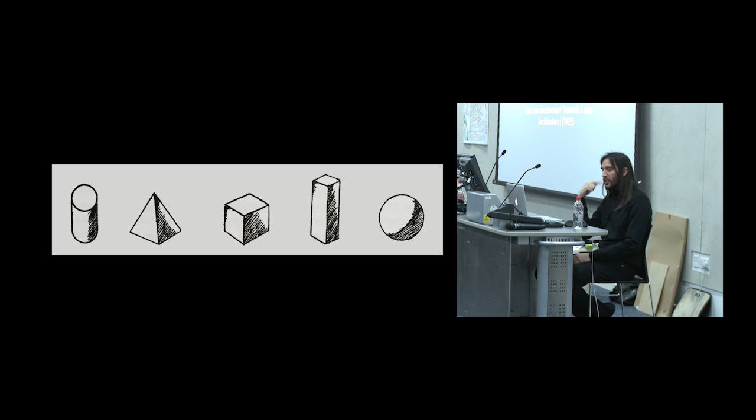Like 20 years later, modernism is at its peak, and we see Mies van der Rohe. He builds the Farnsworth House, again, built over 2 platforms. So nature can live its own life, he says. So again, it's very clear what's architecture, what's the intervention, figure-ground relationship. There's nothing wrong with it, but you can tell that the relationship they have between the intervention and the context is very clear.

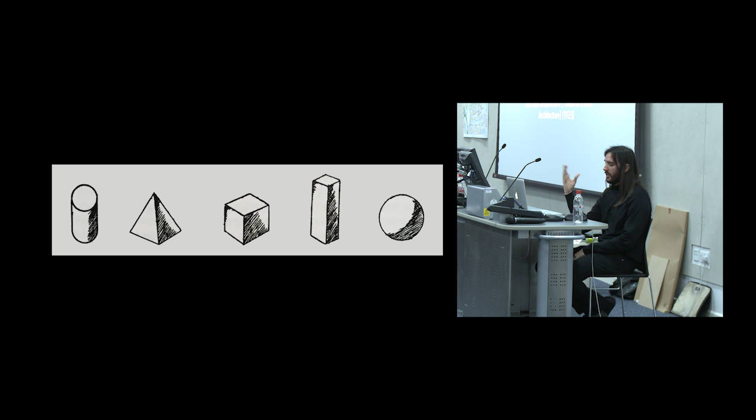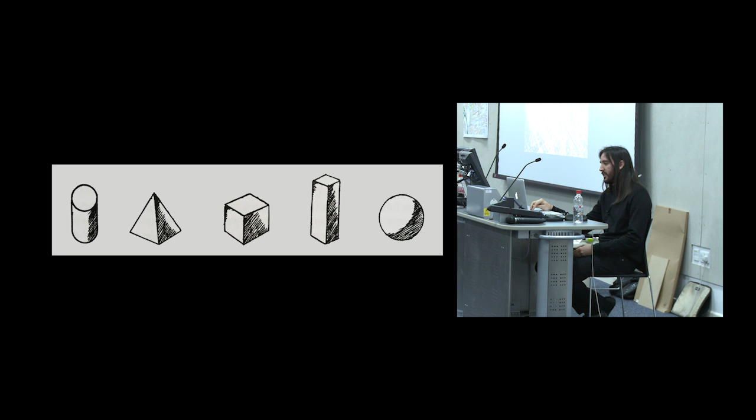What happens when we go to a wider scale? We can go to Unité d'Habitation, Marseille, a wider building, also dwellings, same principle. Over the structure, you have the nature, a very modernist approach. And if we keep going to a bigger scale, things like this start to happen. As you know, modernism is strongly linked to Fordism. The Fordist society, named after Henry Ford, the one that did the cars, is a notion of modern economic and social system based on a standardized and industrialized form of mass production.

So if we look at the intervention, I mean, the whole lecture is going to be, I'm going to be repeating the 3 key points. One would be the figure-ground relationship. The other one would be scale, and the other one is the design approach.

From the figure-ground relationship, we see the same relationship that Villa Savoye or Farnsworth House have. So it's a mutual exclusion. It's very clear where the intervention is. You have the intervention, you have the context. There's the sharp outline that we saw in Le Corbusier's definition of architecture.

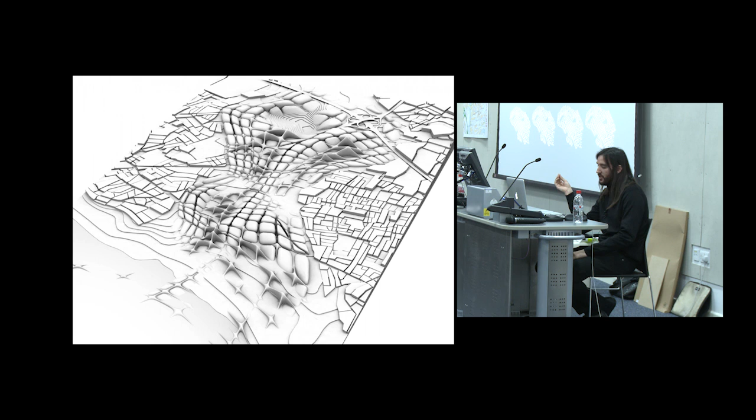So how would parametricists or parametric strategies deal with these things? So the answer to these 3 key points, from the figure-ground relationship point of view, the intervention is not a closed system of relationships. So the proposal absorbs, interprets, and incorporates information from the site. I will go later into these examples, but you can see how the intervention blends into the site until there's a moment where you can't really tell where the intervention starts and where it ends.

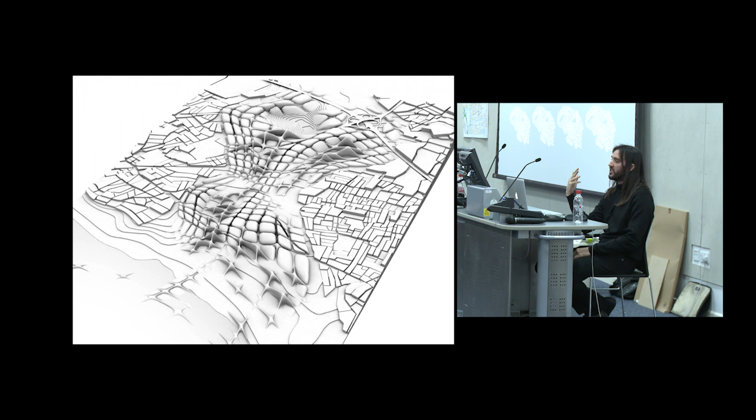Similar to what you can see in Cubist paintings from Picasso or Braque, where you have the figure and the background, but it's not clear where the figure ends or where the background ends.

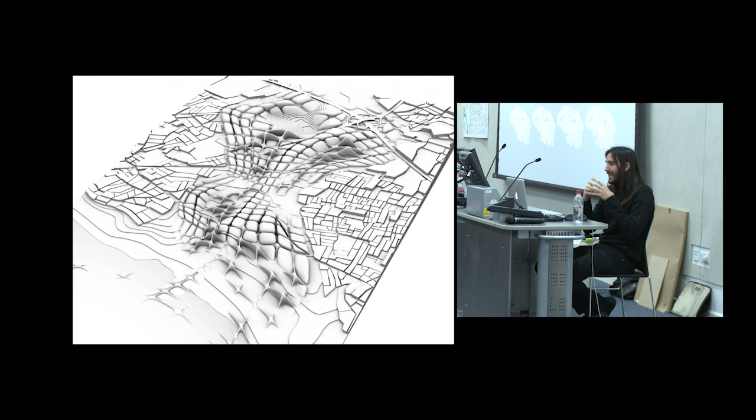From the scale point of view, as opposed to the Fordist logic, to the modernist logic of the repetition of a universal type or optimized solution, the strategy here is continuous differentiation. So it allows us to hybridize different typologies, allowing us to adapt them to the environment. So there's a balance between difference and repetition that allows us to create continuous gradients. And this is crucial because it will enable the architect to work across all different scales, maintaining the same logic, as we'll see later with some examples.

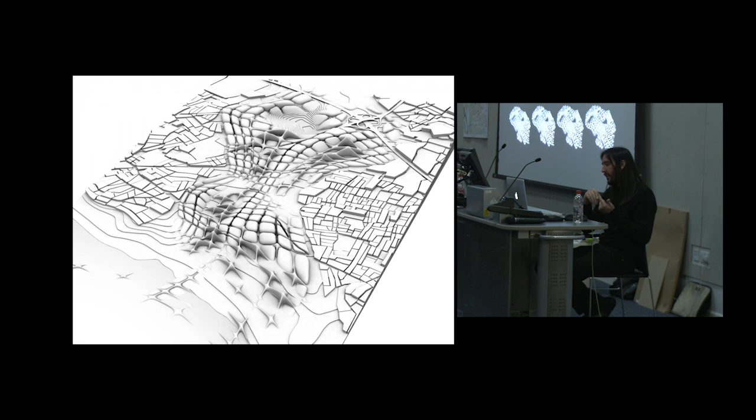And last, so we've talked about the figure-ground relationship, the scale, and then the design strategy. So the final result here is not the end of a linear process imposed from the top. The design emerges from the different relationships that we find in dynamic fields. So here we have a funny word, fields. What are fields for us?

So Patrick Schumacher, at the Venice Biennale in 2008, basically read the Parametricist manifesto. And he said modernism was founded on the concept of space, while parametricism differentiates fields. So fields are full, as if filled with a fluid medium. To visualize this, we can think of liquid, where you drop a stone and then you can see the ripples, or we can think of swarms in nature or flocks.

Every time I mention this, it comes to my mind the first time I went to the Piazza Navona in Rome. If you go at dusk, sunset, you see all these birds dancing and flying, no? And it's amazing because you see thousands of birds, and every individual is different, but they all move at the same speed and they keep the same distance from each other. And the moment one moves or deviates, the whole system readapts itself and it balances itself.

And you get these immensely complex forms, but these forms emerge from the behavior of individual agents. So it's not imposed from the top down. When you do tabula rasa and say, okay, I'm going to do my intervention, I wipe out everything, and now I put my order. No, the order emerges from the system. So I think that's the best metaphor I can think of for a field, how fields work.

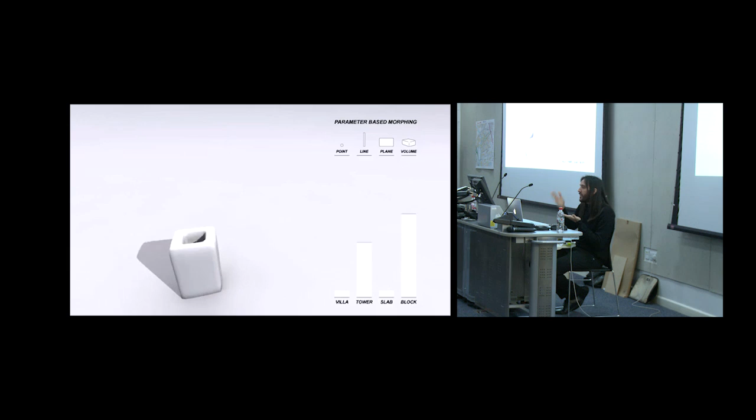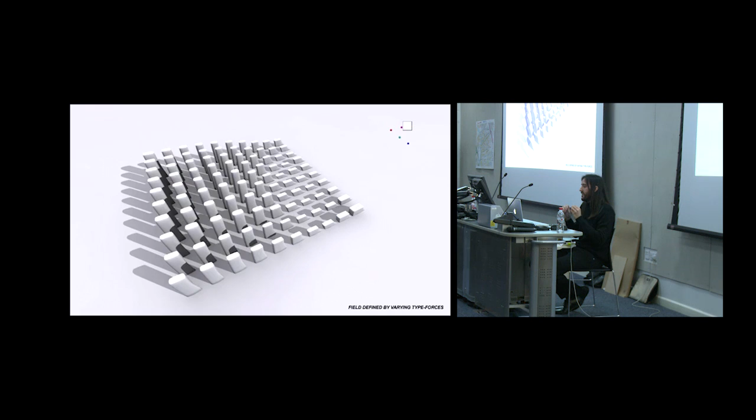But instead of then populating the intervention out of repetition, what we do is we blend them. We start finding all the intermediate situations that you can find. What happens if you put a bit of villa, a bit of tower, a bit of block, a bit of slab? There's an infinite number of possibilities that then arise. So you can then start generating fields when one condition dominates the others, and you can then start playing with density: okay, what happens if the blocks lose the patio, or what happens if we need to create a cluster of towers. These kinds of situations start to emerge.

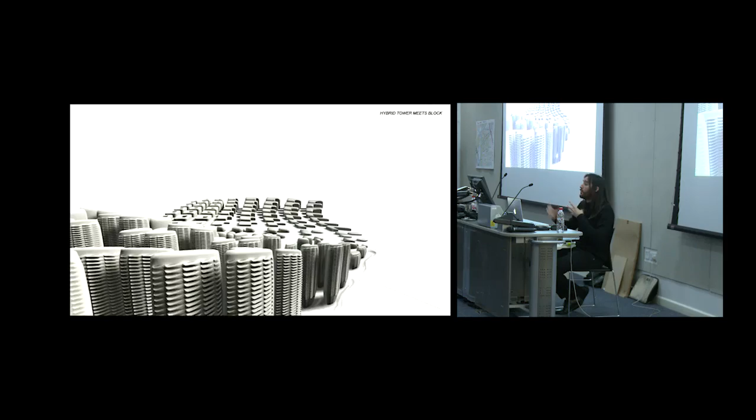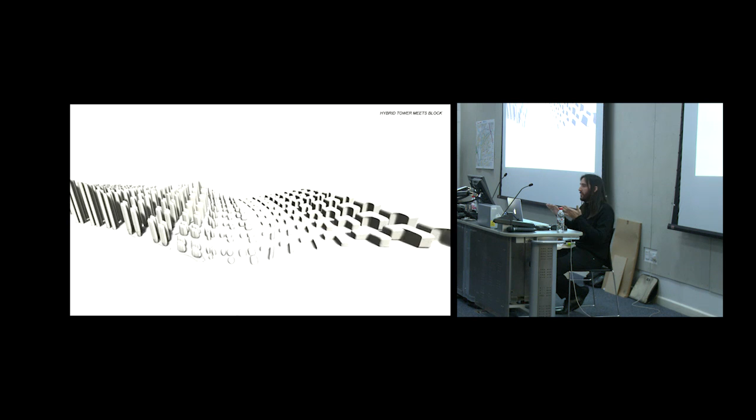But as you can see, we're not dealing with an optimized solution; we're actually blending them, mixing them. So what we need to do first, in order to get some order, is: okay, we have a tool, how can we use it? We have these different typologies, let's start blending them, let's start pairing them. So here we pair, I don't know, tower with block, for example, and we can see how the tower becomes a block, but you never have a pure tower or a pure block. There's always some sort of gradient, continuous differentiation across the system.

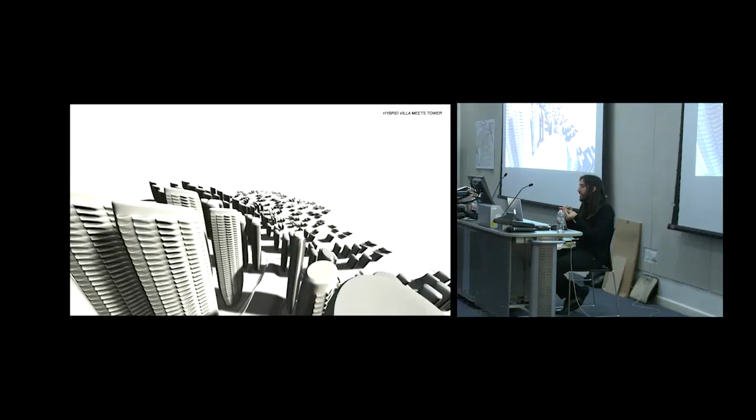And then all the different typologies in the middle that we could not have guessed or come up with. It would take you an eternity to go through all these iterations. And this is why you set the limits of the tool. So in these abstract field studies, what we're doing is developing the sensibility with the tool, knowing what the limits are: how much can we stretch the villa, how much can we stretch the slab block, what happens with the towers, do they have balconies, when do they lose them, can we actually pair two completely opposite types, and new typologies, new orders start to emerge.

If we were just repeating the typologies that we had, it would be very easy to guess, and you would have very clear outlines. Where does the villa neighborhood end? Where does the tower neighborhood end? While here, it's a gradient, and in the middle, a new sort of order emerges. It's not imposed from the top down. So we're not doing repetition. We're not imposing the order from the top down. But at the same time, we do have a very controlled system where if we want to do clusters of towers, if we want to increase the density, we know what we have to do.

So once we've tried all these different possibilities, we take them on site: okay, where is the intervention? And then we define the lines of the intervention. We have a site, and we have lines of influence, where these things are going to happen and how. Before it was an abstract exercise, now they're actually going to affect each other. We were only pairing two types, now we're going to put in the whole thing. So we create a responsive field so that we can do the same that we were doing with the villas, but with all the typologies.

So at a different scale, how much villa do I want to have in the system, how much tower do I want to have, is the point, the line, the plane, and the volume that you see on the top right. So this system is always alive. A bit like the birds, when one moves, the whole system adapts. And that's the beauty of it in a way.

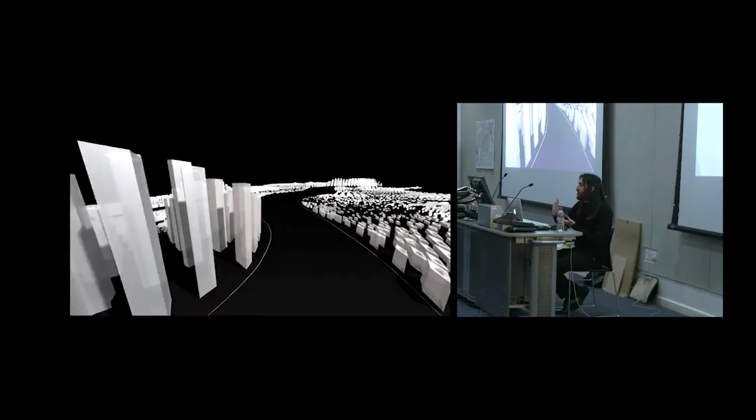It blends. You can't really tell where one neighborhood ends or the other. You get densities that come up, you get clusters, so it's these new types of relationships that appear that we wouldn't have been able to map otherwise.

So again, this was a project that we did in 2007, and you may think, well, how many computers have you got at Zaha? Maybe you have like 200 computers just rendering this. How can I do this with my laptop? Well, I also want to destroy that myth a bit. These ideas are not new, and it's actually very, very simple to build a parametric model with no computers involved. This is not from the office.

This is an exercise called Finding Form from Frei Otto and Bodo Rasch. It's an abstract example, but it'll help us understand how we use this and how it helps us take this abstract exercise to a different stage. So what they do here, they set out to map a city into a ring. They divide it in an equal number of points, and the points are the houses or the places you go to in the city. And you connect each point to all the other points with a thread of wool.

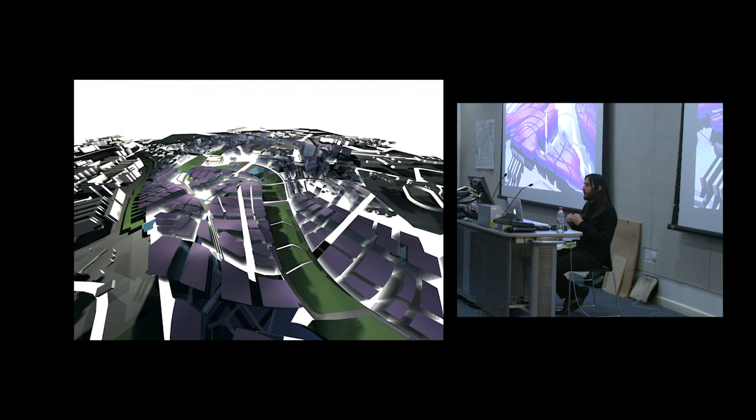It also helps to produce a strong sense of identity. We can remember the image I was showing from Ludwig Hilberseimer. Here there's no repetition, so you have an original skyline that engenders a unique sense of place, because you also generate all these different microenvironments. It's not repetition.

Each place is different, but it's all part of a system, so the coherence of the intervention is maintained. So you have unity in difference. You have all these different blocks, but they are unified by the overall logic of the system. So there's flexibility, but there's no chaos.

It's still a grid. But the morphology that we're proposing is, I would say, much more pliant or resilient to adapt itself, to absorb the information. If you have a pure block or a pure platonic solid, when you get to the edges, you don't know what to do with it because you have to chop it or you have to deform it.

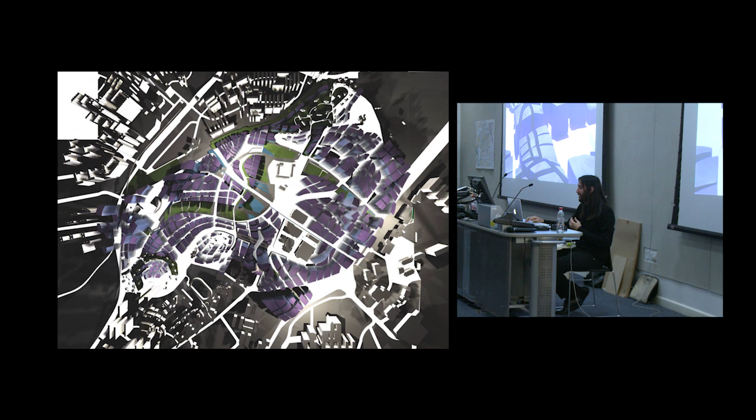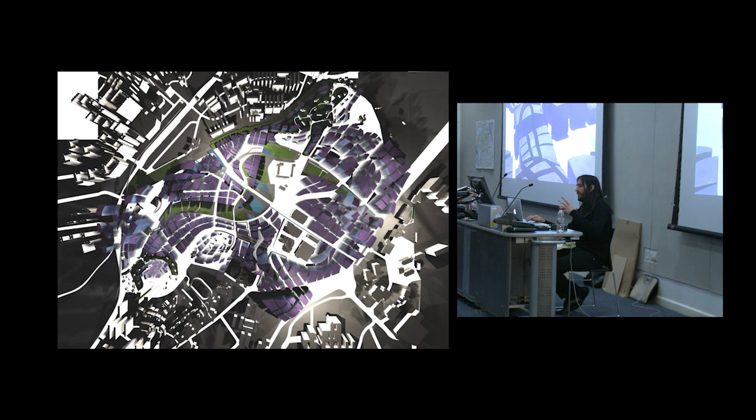But here, deformation no longer means the breakdown of an order. It's the lawful inscription of information. So you're actually given information. It's not a bad thing to deform. And obviously, it helps you then to orient yourself. It's what you see in the old towns of any city in reality. It's just like time. So this was the master plan. And again, I'd like to stress, it's not about the formal language, it's about the strategy.

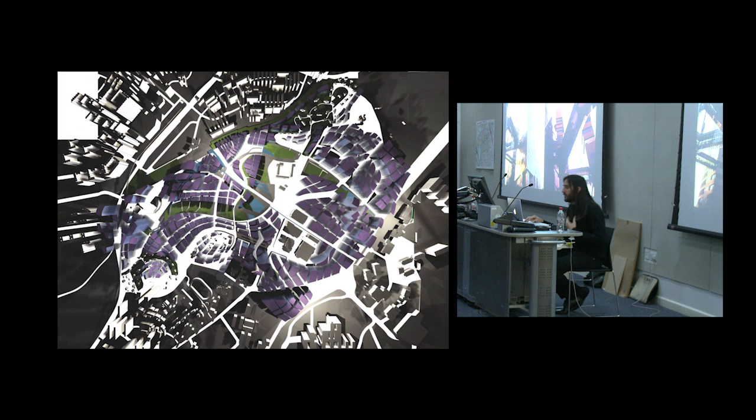So then other architects came and they did their proposals, but it still all fits into a coherent system where you have flexibility. It leaves enough flexibility, but the system doesn't get broken if someone uses a different language. Another project, this one is in Istanbul. So I'm jumping through projects. The point of today's lecture is not to describe this project or the other. It's just to look at the strategies.

So this is a master plan that we did in Istanbul, Turkey, in 2006. This is closer to the first example I showed. We have more computation, but we have all these ideas in the back of our heads. We've been working with the soft grid in Singapore, and it's like, how can we take forward this exercise of Frei Otto and Bodo Rasch? This is a master plan where we had to redevelop an abandoned industrial site. And again, we had very different border conditions that needed to be married, connected.

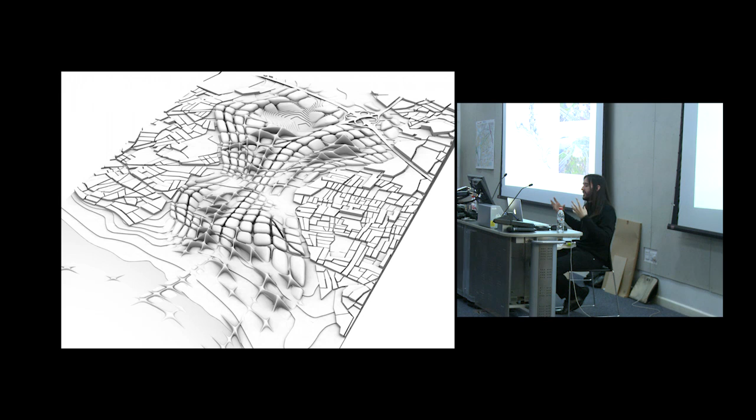So what do we do? Well, we do the same that we saw in the form finding exercise from Bodo Rasch and Frei Otto. We stitch. We know what we want to connect, we connect them, but now through computation, we simulate this dipping exercise of the wool thread into water, and we can give different properties to these connections, and then they start to coalesce, and a hierarchy, an order starts to emerge.

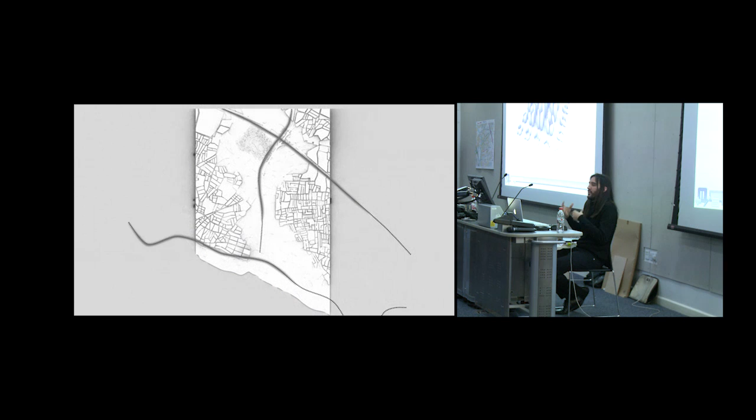So in an animation, you can see here how the grid starts orthogonally, but then starts to absorb information until you can't really tell. We don't have this sharp outline that tells what's the intervention or what's the context. So you can then start to experiment not only with stitching or connecting, but also with growth. How much density do I want to have? And this is exactly the same exercise we were doing before, developing a palette of responses, a language, in order to then populate the proposal.

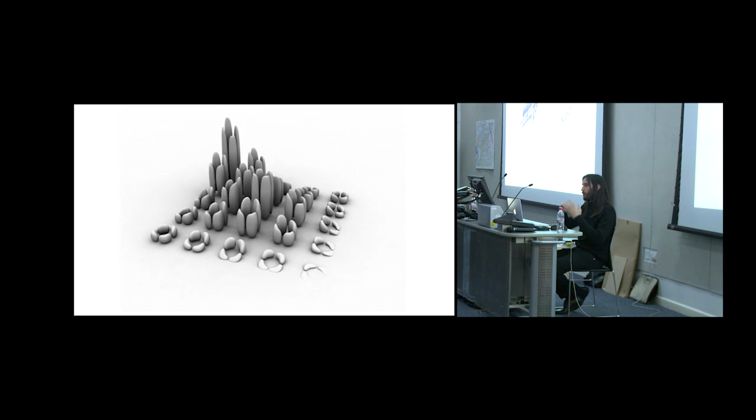So we play with our platonic solids, but instead of repeating them, we play with them and see what the range is, what the limits of the tool are. When does the block stop being a block? Where does the patio have to disappear so that it's still meaningful? When does it become a tower? Can we fade the intervention so that a public park or a public space appears? Can we create clusters of towers? Can we pair them? When they're too close, does it become a full volume?

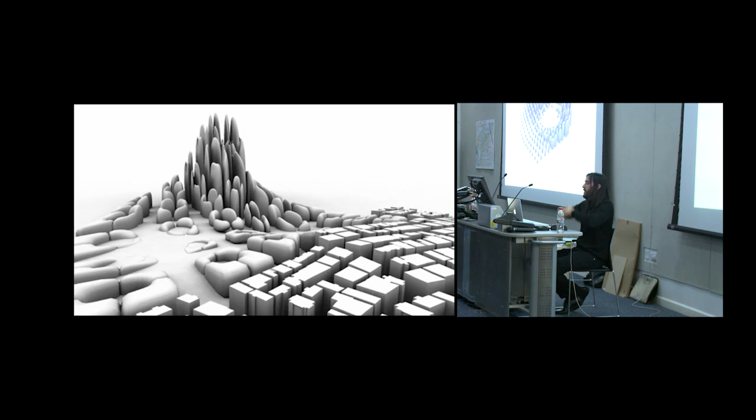So these are all exercises that we do in order to then decide, okay, now we know what we can do, we know the limits of the tool, so we can intervene. We put the proposal, we start with the grid, but then the grid deforms, density starts to appear, and there's a different morphology for whatever goes into the water. We have this continuous differentiation I was talking about, where you're not repeating a typology.

So we jump again in scale. We're already in the building scale, and here it's more about performativity. So we've looked at density, we've looked at adaptability, and now we're going to look at performativity.

This is a project that we started in 2009. It's the King Abdullah Petroleum Studies and Research Center. We call it KAPSARC. It's in Riyadh in Saudi Arabia, and it's on site now.

So here, the problem was very different. What do you do when you're faced with a site that is 500,000 square meters, when your building is going to be 60,000 square meters, and this is in the middle of a desert? There's no context. There's no information to absorb. So if you remember, in all the previous examples, there was a very specific border condition that you would have to connect, however, here we need to come up with that border, with that condition from scratch.

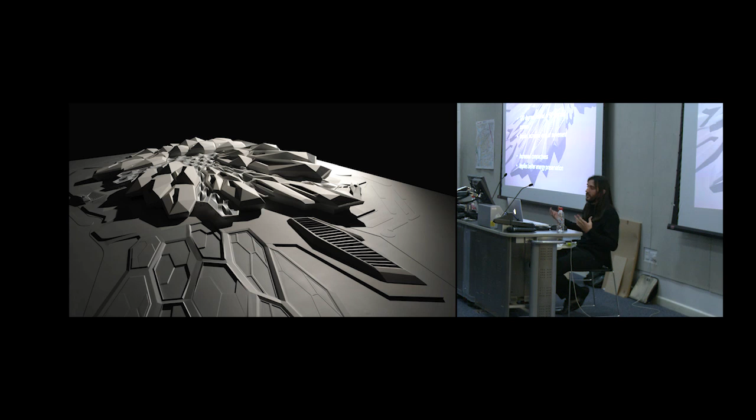So we chose to work with a hexagonal grid system. Why? Well, basically it increases the connectivity because you have 6 instead of 4 neighboring cells. So you have a higher density of communication, which for a research center is desirable. Also, with 120 degrees instead of 90 degrees, the ease of movement improves.

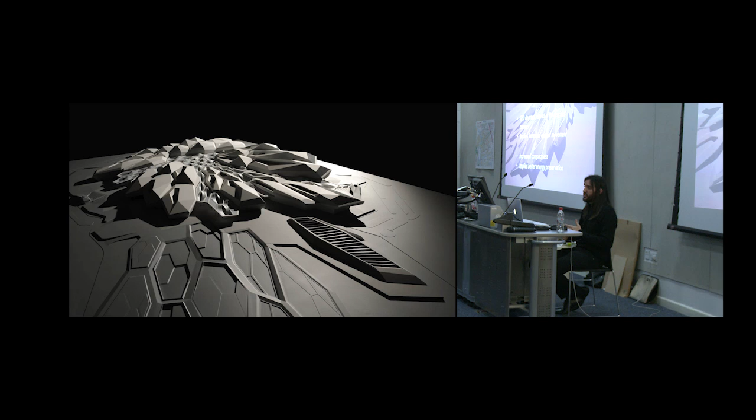And also there's an increased compactness to the cluster of buildings, because this is building scale, but it's actually a cluster of buildings. So it implies better energy preservation, which, considering that the building is in the middle of a desert, is an important thing.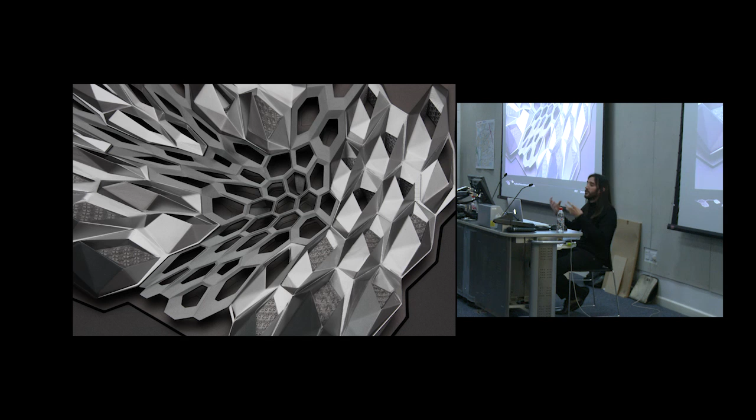So we developed this idea of a hexagonal grid with patios, which is not a closed system again. These can be adapted, extended. So in the future, if there's an extension, you just plug into the system, and then it can grow. It's not a closed system. We can see how we use it to articulate the buildings, but we also use it to articulate the spaces between them, or even the landscape.

So again, we set about to see what the limits of the tool are, and we start. You can see very clumsy examples. We don't control yet because we're trying everything at once. So it's like, no, wait, we need to set up a system, we need to set up constraints, because those constraints are going to be the information that is going to then allow later the order to emerge.

So we set up the system first in plan, and we say, let's work with the hexagons and with the patios. What happens if the patio is small and in the center? What happens if we have one on the bottom? What happens if we have 2 patios where we have maybe circulation and the patio and then the program around it? So we map our platonic solids, our ideal situations, if you want.

But then instead of repetition, what we do is we blend them. We do what we did before at all the other scales. So we start trying to find out what are all the intermediate situations, all these infinite possibilities that can help us later to articulate the project.

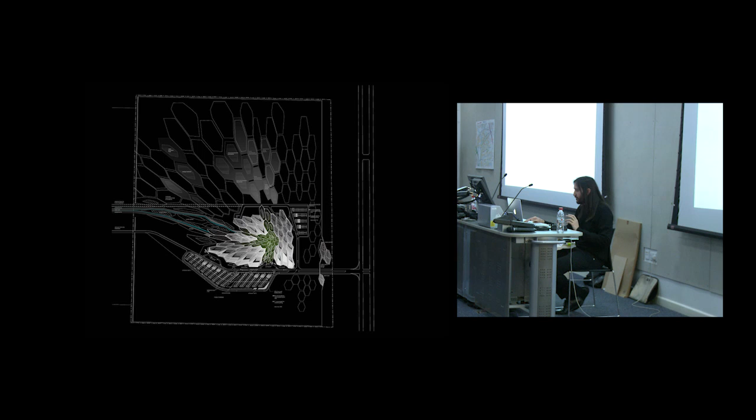This is only in plan. We're just trying to see what the relationship with the patios is, how the hexagonal system can get deformed. It's an abstract exercise. But it allows us to develop the palette of responses. But then we've only worked in plan so far.

But then you realize, I was saying that there's no information because it's in the middle of the desert. Well, it's really not entirely true. In fact, the weather, the climatic conditions such as the orientation, the wind, are going to help us to differentiate this field that was only in plan, but now in section.

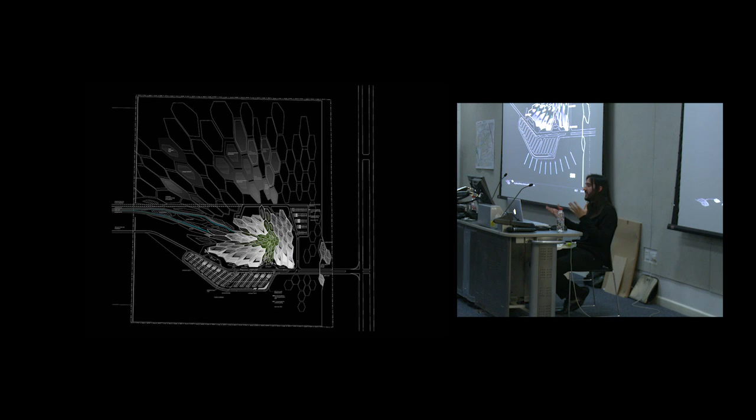So we know that we can open these cells to get the cooling winds into the patios, and then the buildings can grow a hood to protect themselves from solar radiation, and then complexity starts to emerge. Then the system of patios we were thinking about, where we had circulation and we had program, starts to make more sense. So the iterations that we go through start to show much more order, much more control.

So now the section starts to develop, and we do exactly the same exercise we had done in plan, this continuous differentiation, we apply it to the section. What happens if the patio grows? What happens if it goes to the back? What happens if we turn it into a terrace and there's no patio at all? So all these are different steps that will allow us to then define the different typologies, which will then become the project.

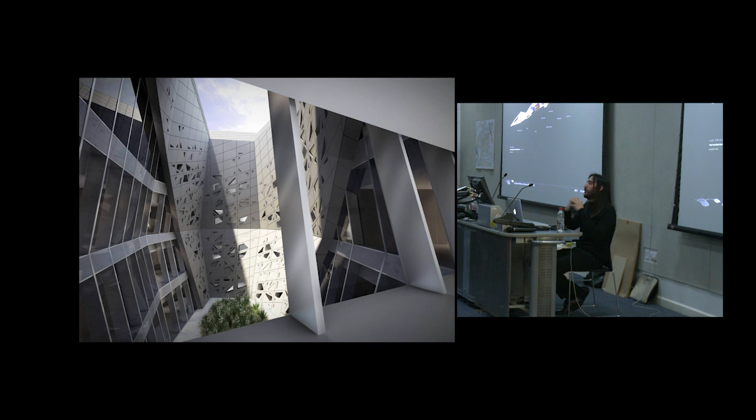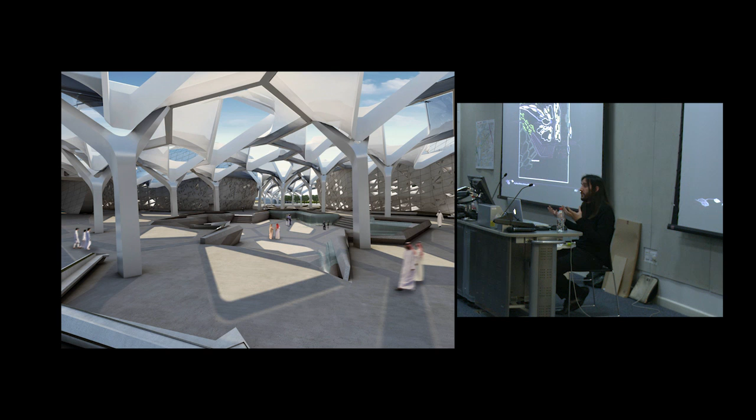So we then start to marry these typologies with the program. So we developed the light cone, we developed the courtyard, roof terrace, indoor garden, and then we put them all together into the section. So in the end, it allows us to make sense of a system. So now we're also taking into account, we generated an order from scratch. It has emerged from our system, but we also have all these strategies that will help us to enlarge the proposal if we have to, and to generate the landscape.

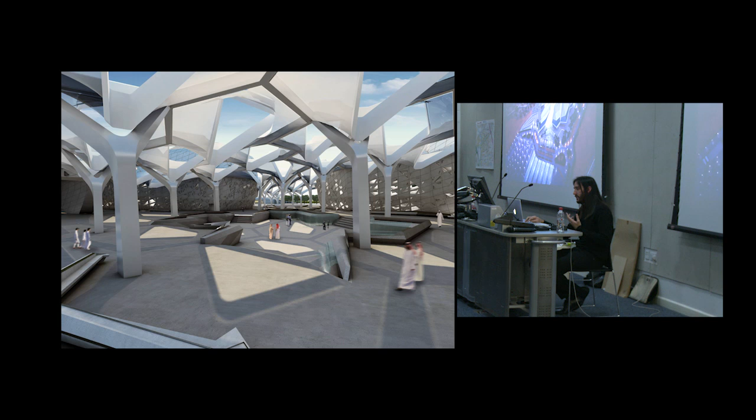So this is a model. This is what the rendering looked like. So as you can see, there's nothing. There was no information whatsoever, a couple of roads. And these are the buildings, for the skeptic ones that say, yeah, this can never be built. Sometimes it does.

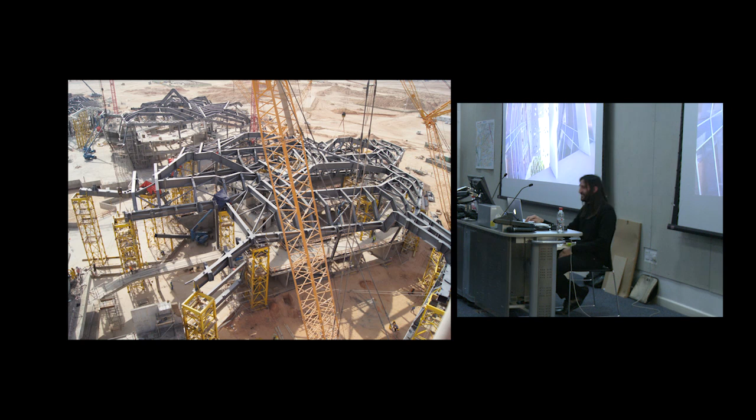And this is how we were visualizing the patios, and we can see how these patios start to emerge, how the pergolas are built. And this cluster of buildings is starting to take shape. We can see it here. And hopefully it'll be built, I think, in a year's time or so. There are a couple of buildings that are done, but in a year or 2 years, the full complex will be built.

So we've looked at building scale. Let's jump to the component scale. When we talk about component, this is the last scale we're going to talk about. We have either performative structure or facade strategies. Before I show another project, I would like to stress that these ideas are not new. In the same way we saw the model from Frei Otto and Bodo Rasch, Gaudi was already building parametric models 100 and something years ago.

So he was very clever, and he knew that if he just generated a system of weights hanging from the ceiling, the shape that he would get, the catenary, was the ideal shape to then hold the Sagrada Familia building. So this is a parametric model. If you modify one of the weights, it has a knock-on effect in the model. It's a super complex model where there is no computation, no computers, nothing like that involved, and it's still very complex. So it's not so much about the tool, it's about the strategy. It's about how you look at the problem, how you face it.

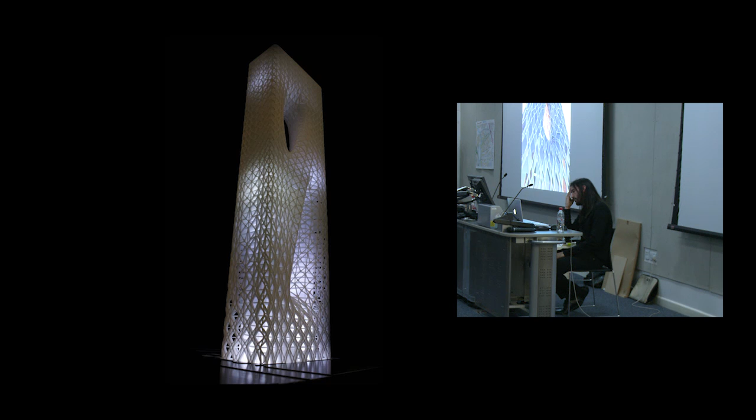This is what we tried to do in a competition. This was in Kuala Lumpur, 2009. And again, basically we arrived at an exoskeleton that actually reacts to the program on the one side and also to the structure. So you get more density when you need it, you get more depth when you need it, depending on the orientation. And then as it goes up, it fades away. But it fades away in a way that you can't tell what's the figure and the background. So it's a continuous gradient, a continuous differentiation.

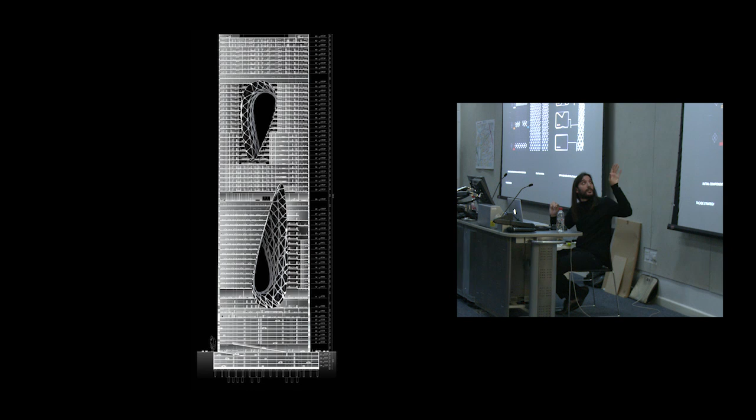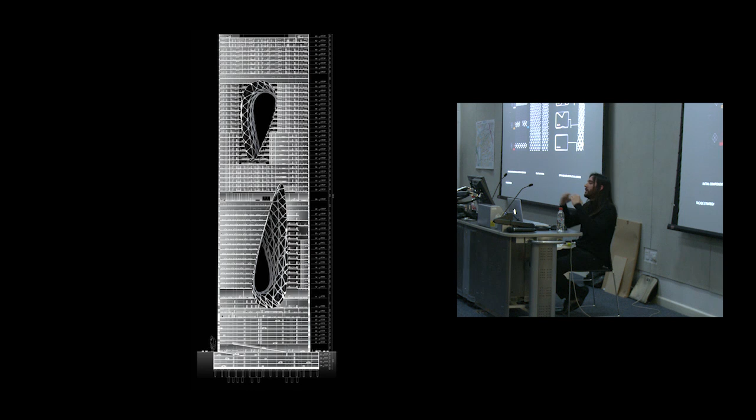So even though we map different programs, which are the five lighter cells that we see in the elevation, one is a car park, the other one was hotel, residential, offices. It was a mixed-use tower. We map them, but what we do is blend them. We don't repeat them and then have a line, a frontier, and then put another typology.

No, we blend them. So you can see here, this would be the generic grid that then gradually gets deformed until it finds its balanced position where you actually have the exoskeleton, so more density of a diagrid below, and then it fades away as it goes up. So the unwrapped elevation would look something like this. You can't really tell where one starts and where the other one ends.

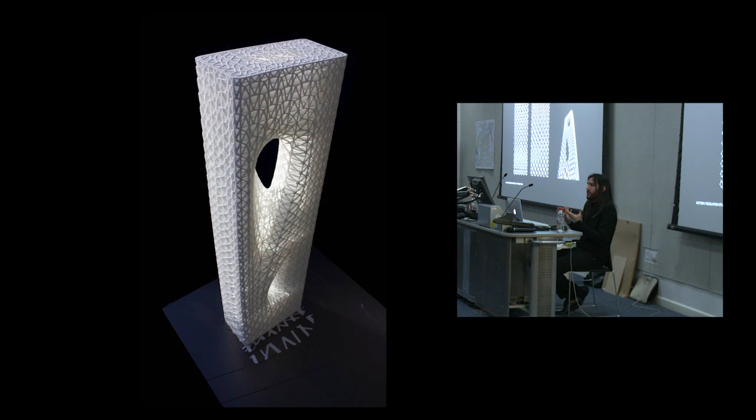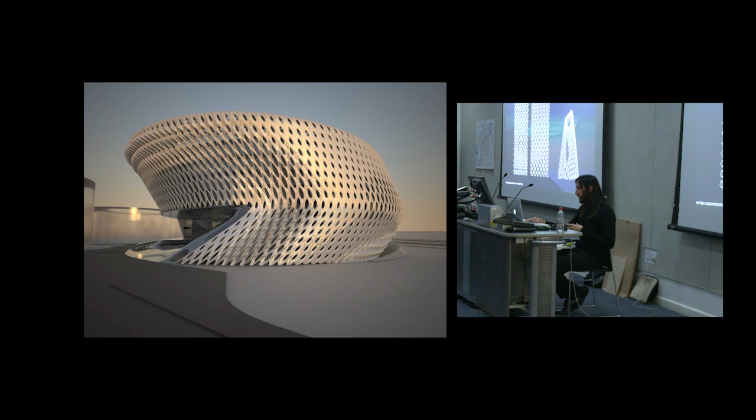Another example would be a competition we did in Madrid, Spain. This is the civil court building, but it was part of a master plan. It was called the City of Justice. Now the situation has been inverted. There's another architect that generates the master plan, and the idea they came up with is that all these different courts, in this case we had to deal with one of them, would generate the City of Justice, and the massing was going to be cylinders.

So we're given a cylinder, we're given the massing to work with, and then we start: okay, how can we play with this? How can we charge this with information? How can we differentiate it? Again, you look at the program, you look at the orientation, generate the patio. So what do we want to open to? Do we need to protect ourselves from the south, from the west? How can we then generate an envelope that reacts?

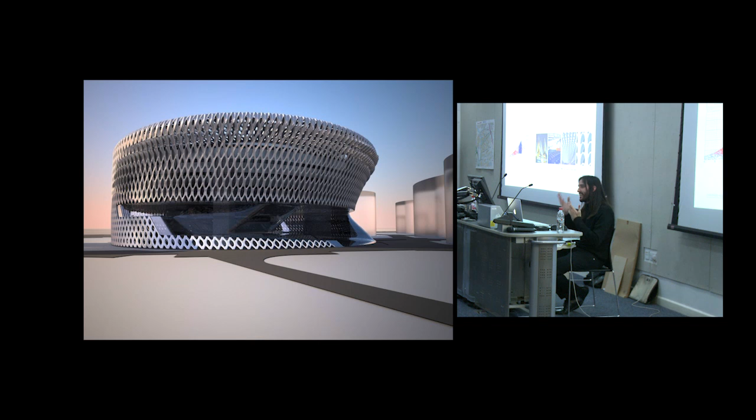Because we knew it had to be a cylinder, so how can it react to the program inside and to the orientation? We can see there all the four elevations, north, south, east, and west. The north is obviously more open, but we can see in the other ones the gradient. So it's a full system. There's this continuous differentiation where the program blends. You don't know where one starts and the other ends. Sometimes you need to look out, sometimes you don't, sometimes you need privacy, sometimes you need sun.

So this would be the section. How do we get that envelope to work? Again, we do the same thing. We start in abstract. We develop our ideal scenarios where the panel would be closed or open, or you protect yourself from the east, from the west, depending if it's north or south, or if it has a program that needs to be exposed or not. So then we generate a field that is responsive, and we start blending all these different conditions. And we start experimenting with the tool, seeing what the limits are, allowing these orders to emerge.

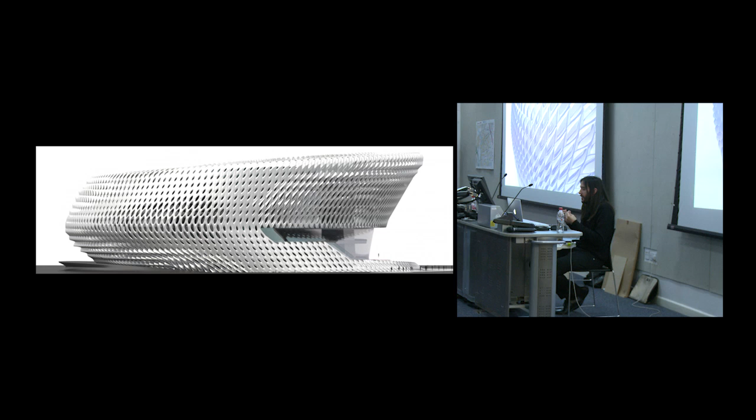So this is in abstract, but then obviously we take it to the building, we take it to the envelope, and just like we've seen in other cases, once the strategy and the palette of responses is developed, we don't know what the result's going to be. This is not an order imposed from the top down. We get a system that is responsive, and we can play with it. So again, we're not doing repetition, we have continuous differentiation. So the figure-ground relationship is of inclusion; it's not mutual exclusion.

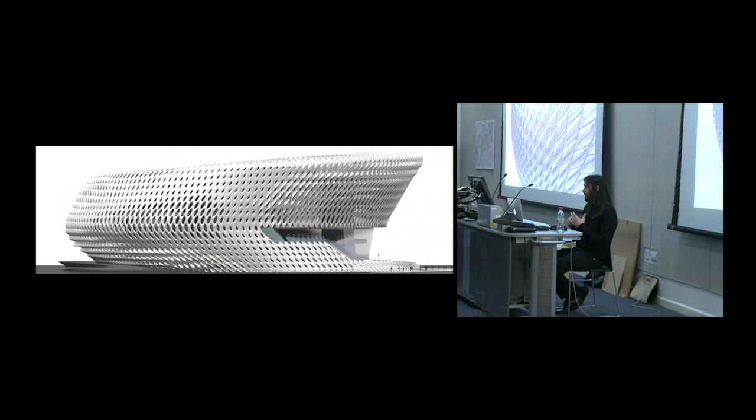So could we articulate the complexity of our contemporary built environment through bottom-up processes, in the same way we see articulation in nature through endless shapes, product of evolution? I don't have an answer for the question, but I suspect that as architects, we sometimes limit ourselves, taking too many things for granted, and with the current tools available, I think the possibilities are infinite. So since I started the lecture quoting Le Corbusier, I'd like to finish it quoting a poet, William Blake, precisely because of this notion of infinite possibilities that we have now. William Blake in The Marriage of Heaven and Hell said: if the doors of perception were cleansed, everything would appear to man as it is, infinite.